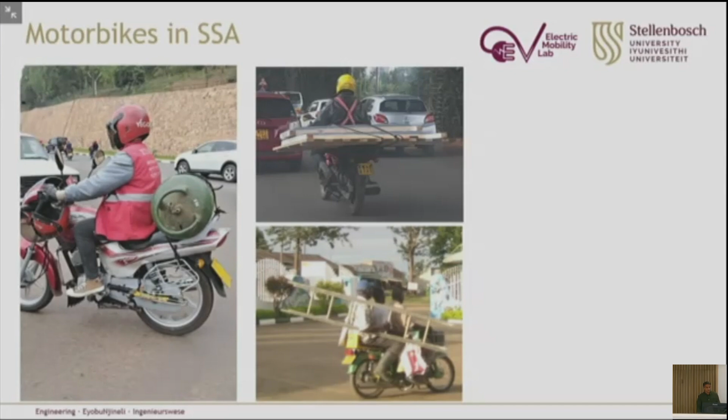Building supplies, as you can see there, gas canisters, and this taken by Heath a month ago in Kenya, again, building supplies. So it's a real mode of transport that moves people.

Obviously, what we know is the last mile delivery, and that is also some of the work that you'll see this morning. So we'll present some work on last mile delivery, but also on what they call boda bodas - it's these motorbikes in Kenya.

And in our lab, the future is slightly uncertain - we'll find out a bit more next week. But what we try to focus on is, first of all, just to keep people moving. But we're also asking the question, how is mobility impacted by electrification? And to what extent does the mobility patterns that we observe lead to a burden on the electrical infrastructure?

Because in the rest of the world, they slap electric vehicles onto the system, and their grids can carry it. But in our case, we have limited generation capacity. We have old and aging and fragile electrical infrastructure, which means a lot of our work is on that as well. We try to also consider the environmental impact.

Again, sub-Saharan Africa is a weird beast. When you go electric, you don't necessarily reduce the carbon emissions that the vehicle emits just because you're shifting the burden onto Eskom, and Eskom tends to be coal dependent. So in future, absolutely electrification makes sense from a CO2 perspective, but currently, as you'll see, not necessarily.

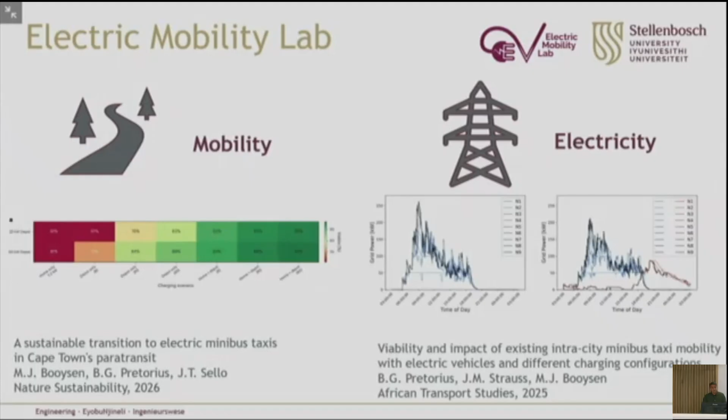So some of the results that you'll see today is Joshua will be presenting on how viable is it to go electric with minibus taxis. Also be presenting quite a lot, all of them, on the impact on the grid - just what does the load profiles look like? To what extent can we mitigate that load profile and shift the loads into the times when there's low energy demand? We'll present some environmental results, so CO2 results, and also some air quality results that you can ponder.

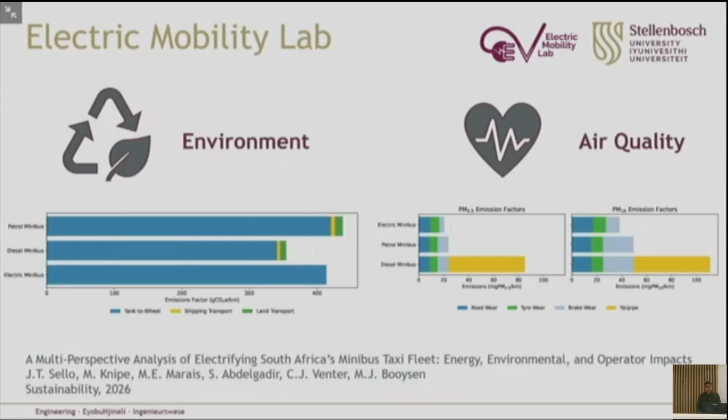If at any time you want to look into this deeper, I sent a PDF out to everybody who's here. You can also go and look at ev.sun.ac.za publications and have a look at all the publications if you struggle to fall asleep at night.

In terms of the jobs and skills, we're working with TETA, the Transport Education and Training Authority, looking at training and educating. So the reason why maybe you weren't informed as well as where you need to be this morning is because I was teaching at the City of Cape Town, teaching taxi owners on electrification of bus fleets, for example. So a large part of what we do is information transfer and building skills.

So what Waldo will be demonstrating a bit later, just after lunch - this is a way to get you back from lunch into the room - Waldo will be demonstrating our test bench here, which is more like a training bench, explaining some of the electrical principles of electric mobility. So we've done a lot.

I don't want to boast too much, but we've published substantially in the last few years. Since 2020, we've almost published 50 journal publications in this group—not a big group—and 12 conference publications. We've had publications in some of the best journals in the world, so the work that we do is relevant, and it's evidenced by the fact that we're publishing in places where people want to read.

What's also important to note is we've been doing quite a few projects on the side. We've been working on taxis and buses, looking at charging facility and charging infrastructure with Sanedi and through the European Union. We've also looked at some projects with the World Bank. Stefan will be presenting on driving behavior work we did, training motorbike drivers on safe driving. And we've also, as I said, developed quite a lot of skills.

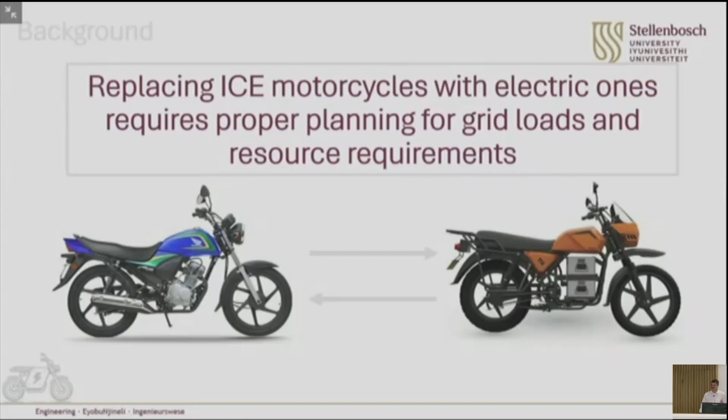My research is centered around this observation that replacing ICE motorcycles with electric ones would require proper planning in terms of grid loads and resource requirements, because we know that our grid is questionable and this is an expensive operation. So the research question that has been set out is quite wordy, but it's basically: how can fleets of electric motorcycles with swappable batteries be modeled and simulated using large data sets with different charging configurations and energy sources, to plan for the electrification of commercial two-wheeler fleets in resource-constrained sub-Saharan Africa?

Now you'll see I highlighted 3 words there: simulated, data sets, and configurations. Amongst all of this wordiness, those are the 3 things that are really important in this pipeline. It needs to be centered on data. The simulations tell us the answers such as grid load and resource requirements. And then there's also different configurations that we set up to try and test different scenarios.

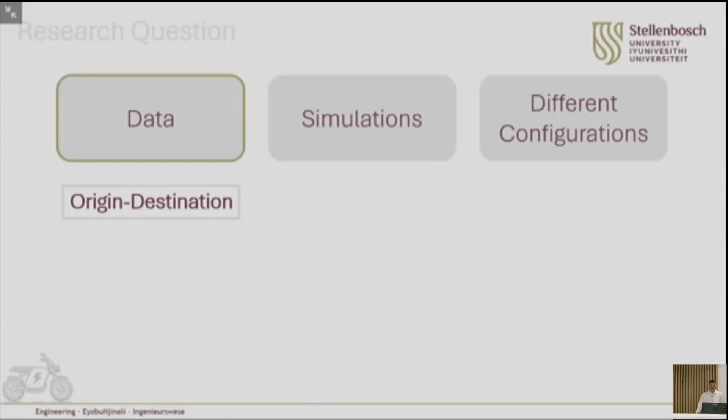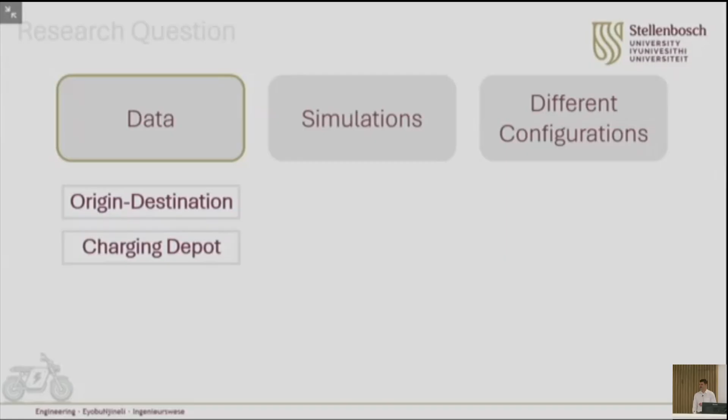There are 3 main data types that we use. Firstly, origin destination data—not ideal, but it would be good to know the routing between the beginning and end points. Then the charging depot data, which is basically the power profile of an existing electric charging station—this is great for validation purposes. And then finally, GPS tracking, which is the best thing we can use so far, which basically tells us where the vehicles are at any given point. From that, we're able to do our simulations.

Essentially, the overarching thing here is to know: if we took an ICE fleet and made it electric, what would the grid load be? What would the resource requirements be? Which we see here in the simulations.

The different configurations we look at can be split up into operator-based or depot-based—one is more behavioral, the other is more managed. If we look at home charging and battery swapping, these are things that operators can do; it's a decision they can make, also coupled partially with the business model of the provider. But then also looking at solar offsetting and off-peak balancing—this is something that if you had a centralized charging point, you'd be able to manage quite nicely.

And we'll look into that a little bit later.

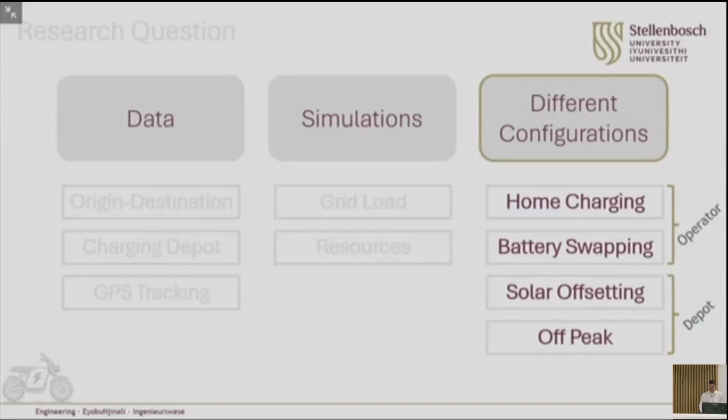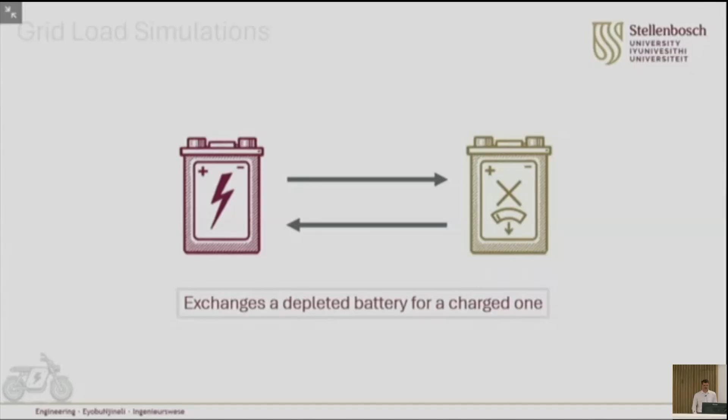Essentially, the crux of the matter is a motorcycle arrives at a swapping station. He exchanges a depleted battery for a charged one. Then all the depleted batteries join a queue and wait to be recharged. Once a battery is recharged and a charger becomes available, the next battery starts recharging. And then all fully charged batteries are pooled together and wait to be swapped in.

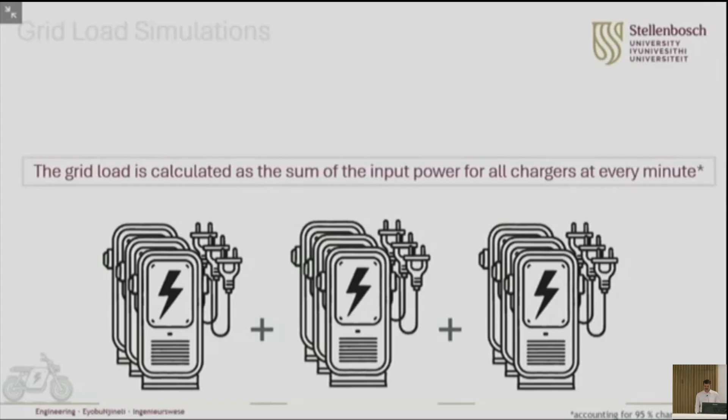As part of the simulation, the grid load is calculated as the sum of all the input powers of the chargers at every minute, accounting for some sort of charger inefficiency. Throughout the simulation, we track the size of the fleet, the battery pool size, and the number of chargers just to understand what would be required to meet the demand.

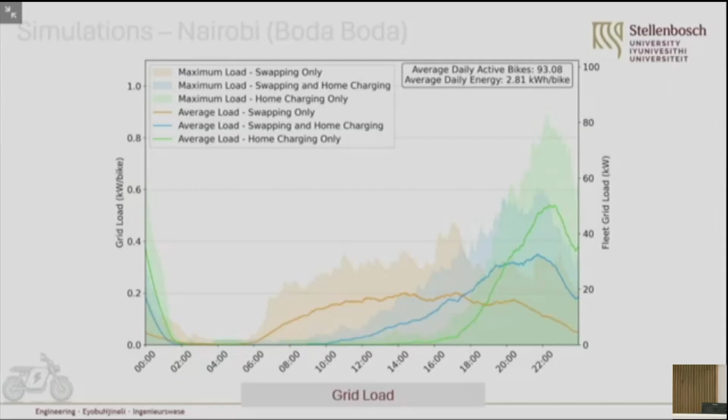So that's why we introduced a third scenario, which is if you were to swap when needed, but also charge overnight and start the next day with a fully charged battery. That's what you see here in this blue line. So that's on the operator side.

But if we were to look at a commercial fleet, for example, in Cape Town, this is data taken from a last mile delivery service provider. And if you were to look at this in terms of a fleet that had a centralized charging point, and you were able to try and schedule the charging in a way that you could, for example, balance it to only use off-peak time of use tariffs, this would be something that we would look at.

Obviously, this requires a little bit more resources initially. This would require more batteries, possibly more chargers. But in the long term, your operating expenditure will go down because you'll be paying less for electricity.

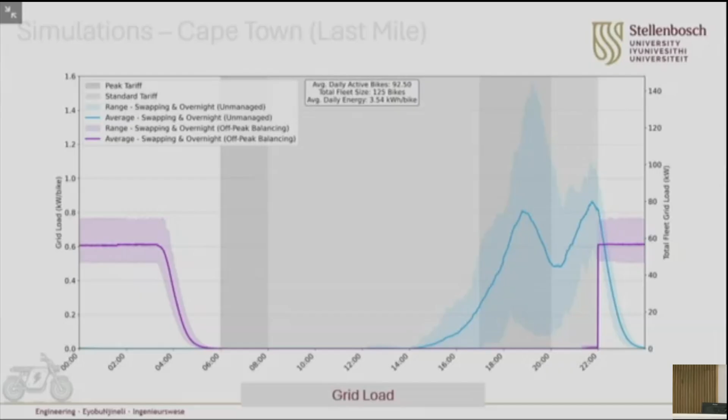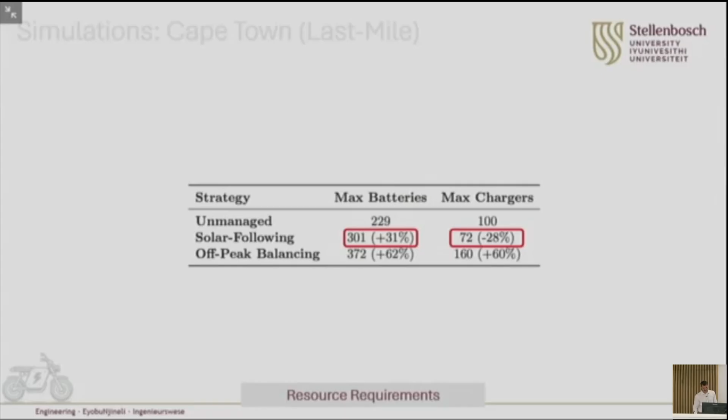Basically, off of these simulations, we see that there is an increase in resources that would be required. It happened to be the case for the solar following that there was a decrease in chargers. It's not always going to be the case, but we can see that the solar following approach definitely did better than the off-peak balancing in this case.

Just another side note, we've looked at batteries, looked at chargers now, but before anything, it's essential to look at whether your fleet is already optimized before electrification or anything. We saw in the Cape Town last mile delivery case that they had a fleet of 385, but with just some basic optimization, we could meet demand with 125 motorcycles. And that's before any electrification or anything. So we can see that these fleets are already kind of overinflated.

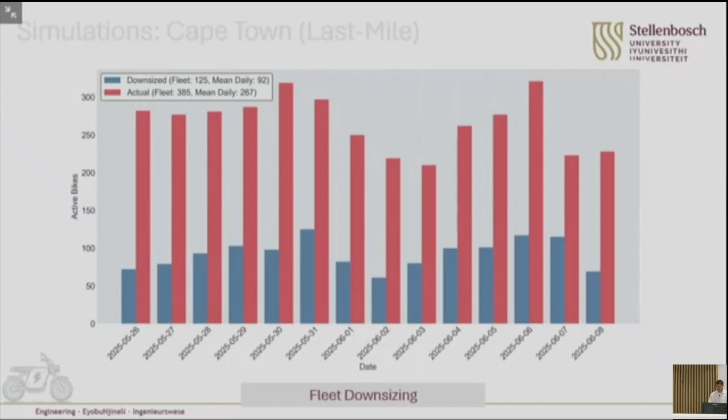So this has all been about the simulation side, but there are constituents of the simulator that have also been really good to get into and do some research on.

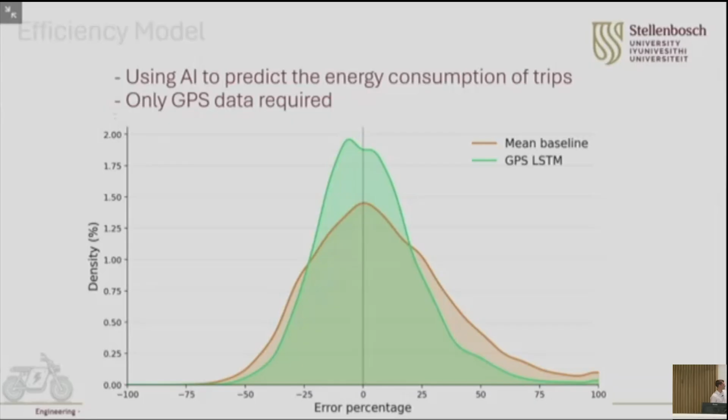Another thing we've developed is using AI and machine learning to predict the energy consumption of trips. In this case, this was for electric motorcycles, once again in Nairobi. This is cool because it allows you to predict energy consumption based off of just GPS coordinates or GPS data alone, and it's a much better way of doing it than just using the mean. You can see on this plot the difference in error rates versus just blindly using the mean - a bit more sophisticated.

Okay, cool. Is that it? Okay, yeah.

As Heath is walking up, I just want to mention, this is freely available - you can go and download it, and then plan for grid electrification and see what the impact is. Just as a side note, this crazy dude here finished his master's and his PhD in 14 months.

Testing, 1, 2, 3. Okay.

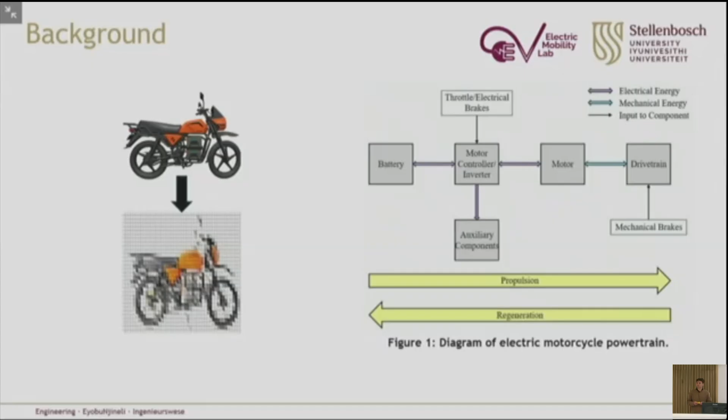I've developed two powertrain models of the Roam Air: a simple powertrain model and a more intricate digital twin. The simple powertrain model is driven by measured speed, with the tractive force calculated at the rear wheel, and calculations flowing from the wheel through the motor and inverter efficiency maps and to the battery. This model enables simple and fast simulations and is used to assess the impact of component parameters and riding conditions on energy consumption.

The digital twin is driven by throttle and brake signals, which translate to torque requests that drive the bike. This model consists of 4 subsystems: the battery equivalent circuit model, the controller block that emulates the actual bike's control processes, the motor model, and the vehicle dynamics block, which includes the drivetrain parameters and calculates the environmental forces on the bike. This digital twin enables the user to swap out components or change controller settings and test the relative performance of different powertrain configurations for a given drive cycle.

The component model parameters were determined through experimental testing of the physical components. Laboratory tests were conducted to derive efficiency maps for the motor and inverter, battery model parameters, motor model parameters, and drivetrain losses. Additionally, road tests were performed to assess the impact of speed and battery state of charge on regen braking, and to determine the aerodynamic and rolling resistance properties of different rider and bike combinations.

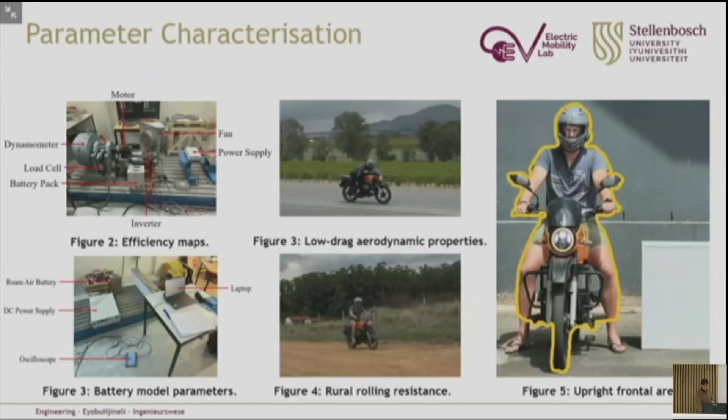For 6 drive cycles generated in Nairobi, Kenya, the simple powertrain model predicted consumption with errors of less than 3% for half the trips, and less than 12% for the other half. These larger discrepancies were due to GPS errors and not incorporating component power limits.

For 6 drive cycles generated in Sello, South Africa, the digital twin predicted energy consumption with errors less than 3% for 5 of the trips and less than 12% for only 1 of the trips. The 12% error is attributed to the model's inability to track rapid throttle modulations. Despite this limitation, the predicted battery power and motor speed profiles still closely track the measured profiles, as shown in Figure 12.

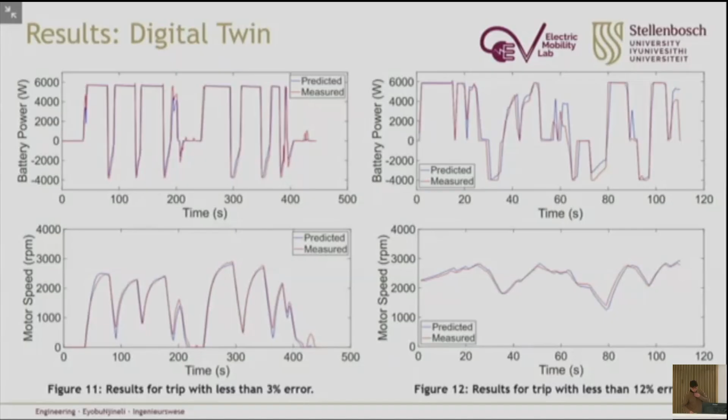Thanks, Heath. Just changing something here. Should come up. No.

No worries. Just in terms of Heath's model that he presented, that model can be used to do virtual emulation, so you can basically deploy 100 bikes in Nairobi and see what the impact is without spending a cent.

Nice, that was like a bombshell that he just dropped there. I hope you heard that.

Good morning, everyone. So I'm Dr. Stefan Lacock, and yeah, I'm like the practical reality of this lab, because I'm the one that has been hit straight through the face by the business world of going electric, especially in South Africa and across Africa. So I don't want to come over too negative, but I'm going to try and give my best impression of what I think is currently going on and what we can do to fix it, and how actually all the research that's being displayed here today and that we have done over the past years really comes to a point where you can practically implement it and make some critical decisions.

But before that, the first thing that I need to present to you is that we are trying to improve the safety of commercial motorcycles across Africa. This is a World Bank project funded by the SSATP. We've also, in collaboration with Discovery - I think most people here have that white chip in your car that tells you that you are driving bad every morning when you're on your phone, even if you just open Google Maps, completely frustrating - we are partnering with them to create a similar model for motorcycles.

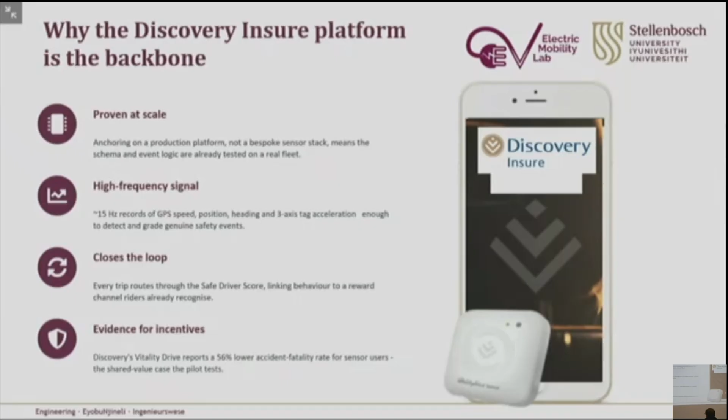But now the key question is: is it the training that improves safety, or is it the feedback that improves safety? So we tested this.

We had a small pilot cohort of 50 riders that we trained here in Stellenbosch about a month ago. We gave them practical training - as you can see there, a Woolies Dash motorcycle driver going through the cones with one hand, far more difficult than you think. Most of the drivers that arrived for training actually arrived around the corner at insane speed. I thought a few were going to fall from their bikes - I think one actually did, just as he arrived. But afterwards, they were really, really confident on their bikes once we completed the training.

We look at defensive riding, helmet use, junction navigation, emergency braking, post-crash awareness, and also the data, ethics, and feedback side of things. We're going to scale this training to close to 1,000 motorcycle riders across South Africa and sub-Saharan Africa.

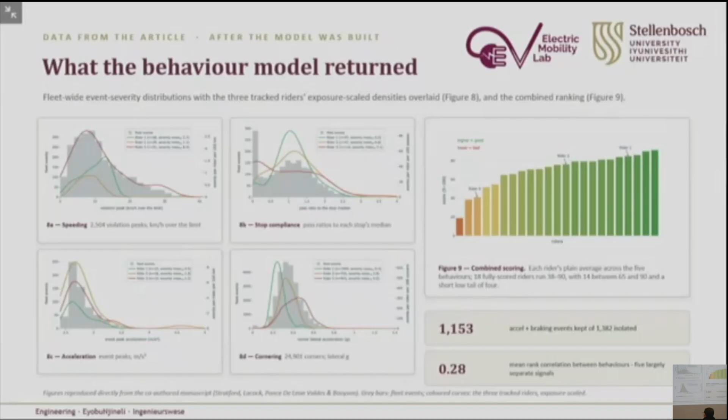With this, we were able to track a lot of behavioral data and put together driver scores. Halloran built the model, and it works well. But what we actually saw, and I think this is the reality check, is that the driver training we gave was all behavioral. Sadly, what we think happened is we gave them more confidence to drive the motorcycle. What we saw is they started skipping more stop streets, cornering more, and actually going faster on the roads. So that brings the question: how do you scale this across Africa so you can actually see a behavioral change in motorcycle riders?

Well, that's where the feedback system comes in. We need to be able to track these drivers daily, create a feedback system where you can actively prompt them on what they're doing wrong, how they can fix it, and what the incentive is for them to fix it. Because the reality is, and what we're going to try to prove through this research, is that without an incentive, the money side of things will always overrule the safety side. If we don't incentivize them to drive slower and create a safer environment for themselves, we're going to struggle to see behavioral change.

So with this, we need a lot of drivers. If you know of drivers, please let me know. I need about 10,000 - that would be great.

But we are continuing with this project, hopefully within the next year, to see if we can have a physical impact on safety. Some of you might be tired of seeing this slide, but I'm not, because it's insane.

We drove the Roam Air 6,000 kilometers across Africa from Nairobi to Stellenbosch. Here's a link to the documentary. It has over 150,000 views already. It would be amazing for you to watch.

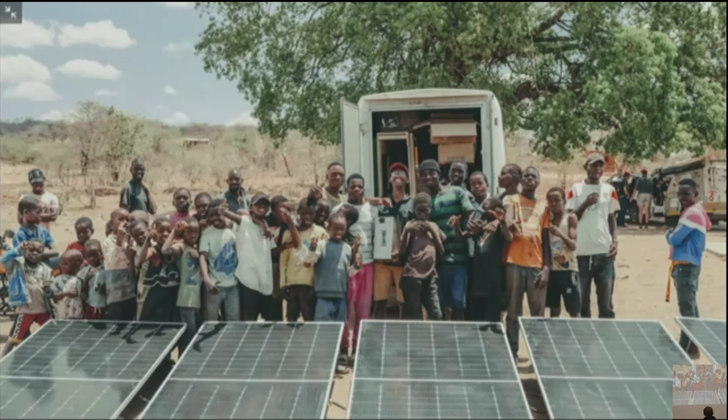But today I decided to tell you a bit of a different thing about the story, since I've presented this a lot now, so this is for me as well. This is a photo that Dr. Jason actually took in Zambia, and I was reminded of it recently since we've done work there.

There's a guy there in the middle with the green and black striped shirt. His name is Booysen. He told us that morning that he's actually a high school pupil who just finished grade 11, but sadly, due to the drought in Zambia two years ago, his village couldn't afford his school fees anymore, so he had to come back to help them farm again.

We arrived at that village about 1 o'clock in the afternoon. This was about 4,000 kilometers in, so we were quite tired. Booysen just saw the bike, and out of everyone in the village, he was the only one who could speak English.

He came rushing to the bike and started spitting facts at me about why electric mobility is the future. I looked at him and thought, I'm supposed to show you what it can do for your future. But he told me no, he has plans for this - he's going to farm this way with the bike, and he has a mill he wants to put on the back, etc.

It just kicked in that motorcycles aren't new in Africa. Electric motorcycles aren't new either, but they create an opportunity in Africa to actually change the system - the way we build the infrastructure and supporting structures around electric mobility gives us an opportunity to build a more sustainable future, not only for urban centers, which I'll get into now, but also for rural settings.

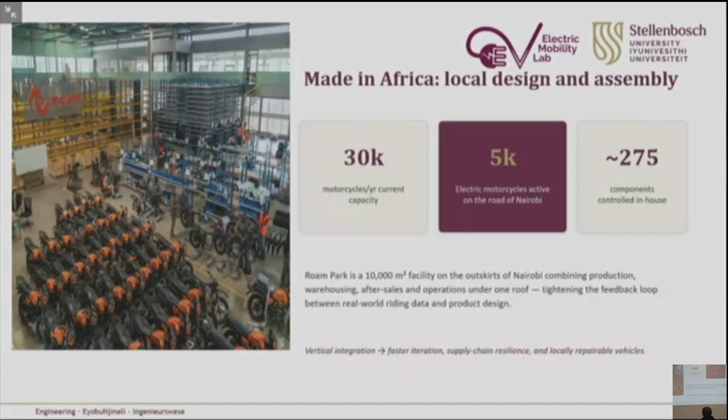275 of the components are localized within the factory. This is the motorcycle, as you saw it beneath - well, I saw it for 6,200 kilometers. It's definitely durable, has all the quirks, all the features. But I think it's good for all of us to have a glimpse and start learning from what's going on in Kenya.

We got hit with this article about a week ago, and I'm being spammed by it everywhere - Kenya's e-bike boom runs into a battery and charging bottleneck. There are currently 25 electric motorcycle companies in Kenya. Only one of them operates on a home charging model, and all the other 24 operate on a swapping station model, the one we are quite used to.

The reason for the bottleneck is due to the following stat: with a home charging model, you need 0.2 times the batteries within your network to accommodate drivers, whereas with a swapping model, you need about 2 to 3 times the batteries. So what Halloran presented just a while ago - he mentioned, quite low key, that if you have the investment or capitalization... the problem is it's in the millions of dollars. If you want to build an effective urbanization system with swapping stations, you need a crazy amount of capital to ensure that system meets the demand of the environment.

And not only that, it's a system that will only work in an urbanized environment. And hence we need to start looking at a system that can potentially accommodate both the urbanized setting as well as the rural setting. So this is not the only solution, but it's one of the solutions.

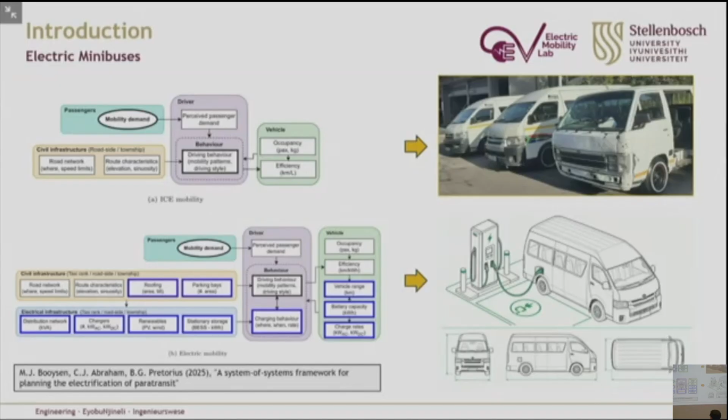So to start us off, a good basis to understand the impacts of electrification or moving a vehicle to electric locomotion is to understand the actual real-world performance for minibus taxis operating on South African roads.

As you buy a vehicle, you'll have a catalog efficiency that the manufacturer, the OEM, says is how you can expect the range to perform in nice tested environments. But when you actually deploy these, you don't really know what the performance will look like.

With the help of Dr. Lacock and Chris, and also Cometro and FlixEV, this is the eKamva vehicle that was imported to be the first pilot of electric minibus taxis in South Africa. If I'm not mistaken, it will be actually operational around October.

Before it's now deployed, we tested and got measurements from the vehicle using telemetry data, then created a model to simulate or predict what the efficiency would be for various driving conditions.

Applying that to a standard WLTC test to get expected performance, we found that for unloaded flat conditions, you have about 0.289 kilowatt-hours per kilometer - essentially how much energy per distance this vehicle uses. This has a massive knock-on effect for range, energy requirements, costing, operating costs, and for our downstream modeling, since this provides a stable input for these models to estimate other effects like infrastructure requirements.

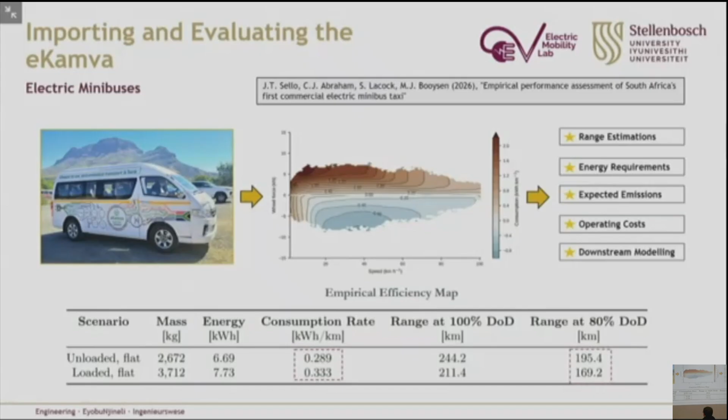A good rule of thumb is also, you can just divide by 3. If I have this much distance I want to cover, I can divide that by 3, and that's how much energy I'll be using. So that was the empirical measurement we got.

Next, as Halloran also touched on well, we need data to be able to plan, organize, and figure out which directions to go in if you want to find the best solutions for infrastructure requirements and deployments. We had various data sets from real world taxi drivers operating continuously throughout the day.

Previously we had fairly limited data. The industry is notoriously opaque, and it's very difficult to get data, but through amazing partners we managed to get a lot of data on a plethora of minibus taxis countrywide. Mainly shown here is the Western Cape, where the Blue Dot data set gave the bulk of the information I used in my models. In Gauteng, a company called Sebenza provided a lot of data, with a countrywide data set including about 7,000 minibus taxis operating currently.

This was very useful for getting the baseline understanding of how long these systems operate daily, how this shifts from a Monday to Tuesday, or from a public holiday or festive season to an everyday operation. You can also look at when they start and end their day, to figure out where the opportunities are for charging windows.

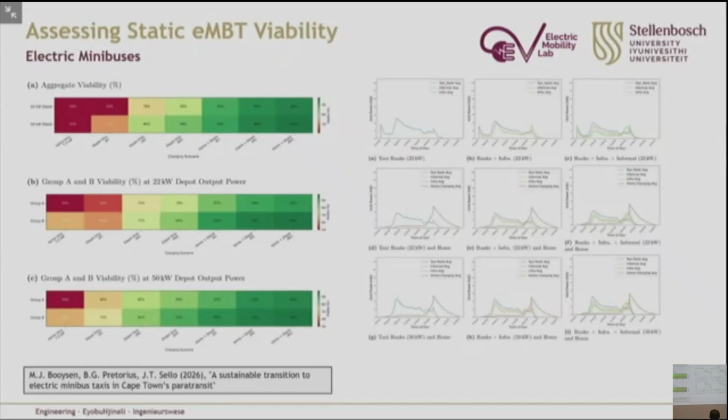After assessing the baseline feasibility, my work came in where I try to understand the behavioral implications of electrification. Through this, I use what's called an agent-based model.

Minibus taxis have a lot of agency. They are able to make their own decisions on their scheduling, their routing, and so on. We can look at the data to inform how that looks on the aggregate, but there isn't a hard-fast rule that says minibus taxis will leave their house at 4 o'clock and come back home at 8 o'clock. So we need to be able to work with that randomness and agency and build that into our model so that we can better plan for that.

As they go out, they might decide to charge. Once they've managed the massive bulk of peak morning traffic or peak morning passenger demand, they'll decide, okay, I need to charge now - this is the best opportunity to charge. Balancing charging opportunity and service delivery is a massive challenge in this kind of model. How do you actually assess that and incorporate it into your model so you can get accurate results?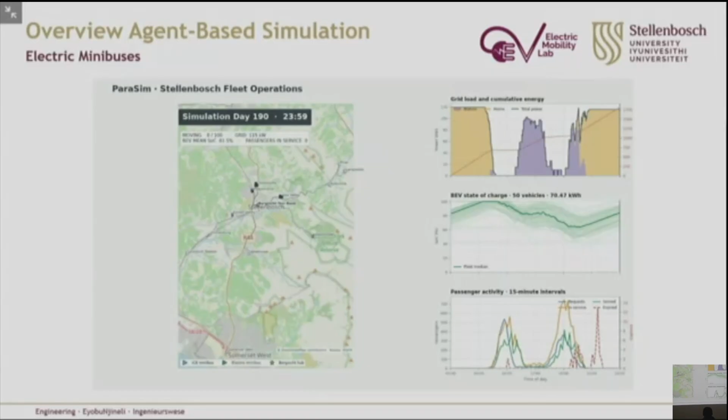What's nice about these kinds of models, as opposed to the previous baseline feasibility study, is that you can actually assess the impacts of electrification on service delivery, on passenger requests, how many passengers were picked up in a timely manner, what the effects on wait times will be, and what the effects on the driver's side are, like their average occupancy.

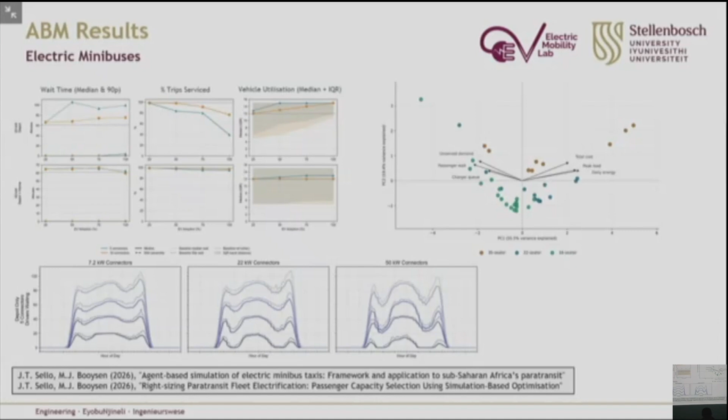Lastly, I want to speak on a very important aspect of electrification, which is the environmental impact. Thinus mentioned early on that yes, electrification is important in terms of long run environmental and sustainability goals. But at the current moment, the carbon intensity of South Africa's grid, if these vehicles are charging off the grid directly, won't really see that benefit.

So we actually do need to be very serious about how we deploy utility scale renewables, or at depot level deploy solar charging, at least to offset and make these vehicles a lot more green.

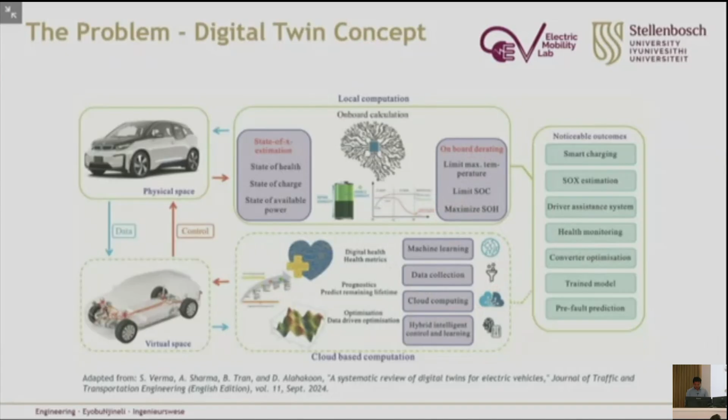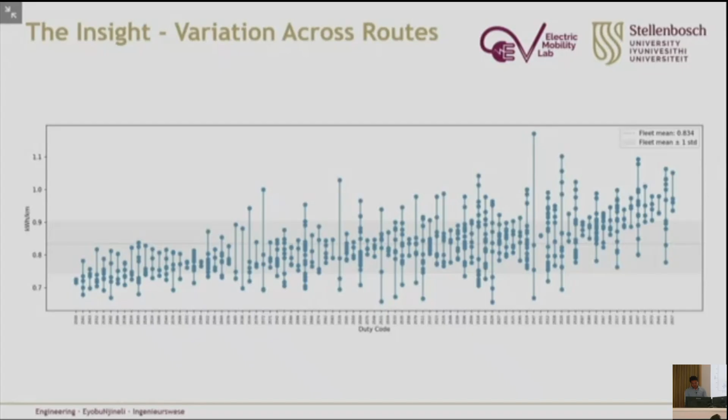So we asked the data: what is driving this differentiation in consumption? The bus departs and returns to the same place, at least in the case of Golden Arrow, so the net incline should be zero - it shouldn't really have an effect, right?

The answer surprised us: it wasn't geography that had the biggest impact on consumption of the electric vehicles. It was the conditions the buses needed to operate in. It's barely the route at all - what matters most is when the bus leaves and how cold it is outside. That's the insight a flat average was always going to miss. It's not that the buses are unpredictable, it's that what's driving them is not geography, but conditions.

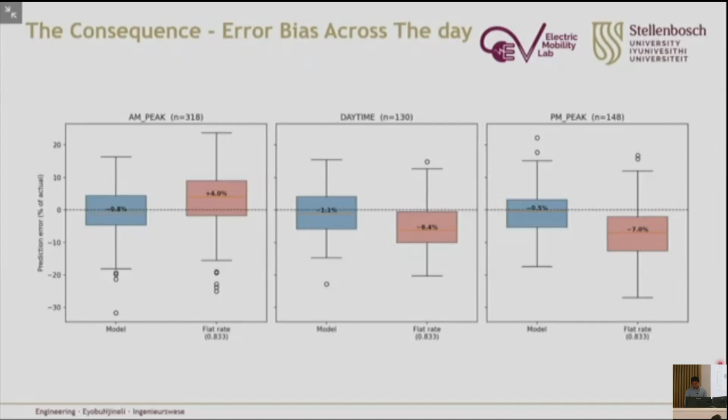Then in the afternoon, it swings the other way around. As we can see here, in the afternoon, it actually overestimates between 6 and 7%, which sounds safer, but it means that capital gets spent on chargers and grid connections that isn't actually needed in that period. So you can't fix this with a single correction factor either, because the error isn't constant. It flips direction across the day, every day. You need the full time-varying picture, which is what the model gives you, and the flat number never can.

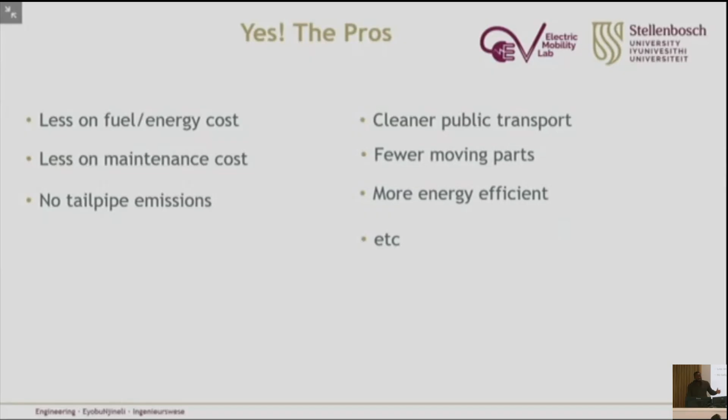That guy said yes, absolutely, we should get an electric vehicle. So I'm talking in the voice of an industry-minded person, where we're in a meeting and everyone thinks we should get an electric vehicle, and that is what my boss is saying - yeah, let's get an electric vehicle. But there's a problem that no one is talking about.

And that's where my research came into, because we needed to figure out what is the negative coming out of the good thing we're trying to solve, right? And the problem was the charging problem. So that is a big thing.

So one big thing I picked out of university, coming out of undergrad and going into the industry, was looking at big complaints on the electricity bill. There's a thing called demand charge. And if you go above a specific NMD, which is notified maximum demand, Eskom or your municipality charges you a particular penalty fee. That is very expensive.

So that is even exclusive of what you actually consume from the grid. And there's something called demand charge, which is your highest KVA that you ever pull in the month. Eskom charges you at a very specific rate for that. So demand charge is a problem, and the charging problem is a problem here.

So what happens in the case of Golden Arrow, using as an example, is all vehicles arrive, and the question is when should we start charging? First time, let's just charge when we arrive. So all the buses are being charged when they arrive. And we noticed that we're charging during the peak period. Electricity is very expensive in the afternoon or evening compared to at night, because that's the off-peak period.

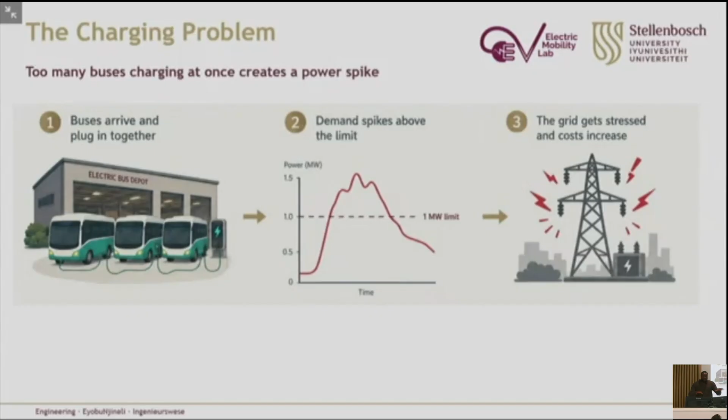And that's where my research came into, right? So the first step, okay, it's a lot probably. So in my research, what I thought about was... What if we could build an optimization model?

Just simple, just get it like a mini computer. What it does is it takes in all the data, the vehicles' arrival time, the SOC, the amount of time needed for the vehicle to be at the depot, for it to be charged before the next period. So it takes all that data, and once the vehicle arrives, maybe by 5 p.m., whatever time it arrives, they all wait till 10 p.m. at night, and it staggers the charging.

So what it does is calculate based on the SOC it arrives with. If a vehicle arrives at 60%, or another arrives at 30% SOC, the 60% vehicle just needs 40% to charge, and you could charge it for a shorter period, or for a longer period with a very low kilowatt. So instead of giving the same demand charge capacity to each vehicle at the same time, you stagger it. It measures based on what is needed for each vehicle.

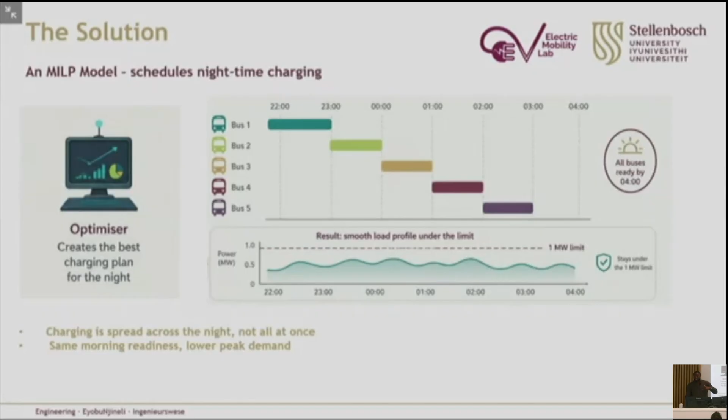And that is the nutshell of what my research was. Instead of them paying so much on their demand charge, we could bring down their demand charge by 17%, which is the essence of getting an electric vehicle, because you actually want to pay less on electricity and also utilize the energy efficiently from the vehicle.

So we brought down the demand charge by 17%, and in the case of Golden Arrow, we tested with 50 buses, for example, at this stage, because there are only 50 buses available at Golden Arrow at the point, and we needed to stay below their NMD, the notified maximum demand. We charged with stagger charging and brought it down to less than 1 megawatt. And then all the buses were ready by 4 a.m. for the available dispatch. So thank you, that's my research.

Just to be sure, we simulated it. We didn't actually, they got there before we did. We came up with an answer and said, hey, it's 27 kilowatt. And Gideon said, yeah, we've been doing it for a week or two. So they were there before we came up with the answer.

Now we're shifting again. This is actually a final year student. We're hoping to get him onto a master's project next year, presenting on electric scooters.

Morning, my name is Ben. As Mr. Booysen said, I'm a final year mechatronics student currently doing my project, which involves developing a digital twin for an electric scooter. A digital twin is essentially a working copy of the exact scooter, behaving in the exact same way, so that we are able to run tests on it without needing the physical scooter.

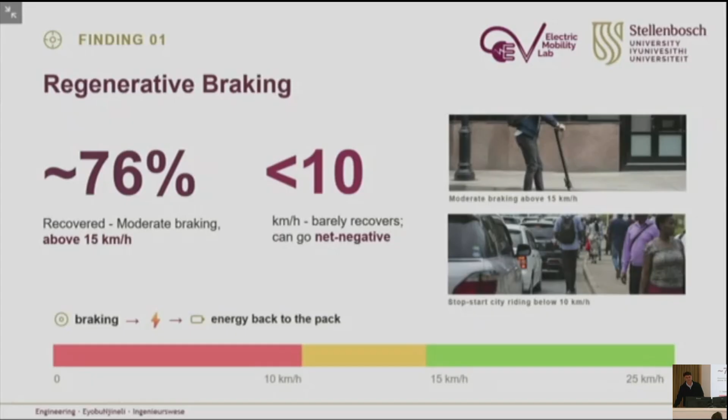Once you start measuring and stop assuming, there are certainly a few things that turn up that nobody would expect. Here's one that surprised me the most: regenerative braking. That free energy you're supposed to get back every time you brake recovers at 76% above 15 kilometers an hour.

So yeah, it recovers 76% above 15 kilometers an hour. But as soon as you drop below about 10, exactly the speed at which stop-start city traffic takes place, it barely works at all, sometimes consuming even more energy than we are getting back. Therefore, anyone planning to size a battery or daily range for these scooters cannot rely on this free energy coming back, not in our traffic, especially because this is where most of these scooters will be operating within the city.

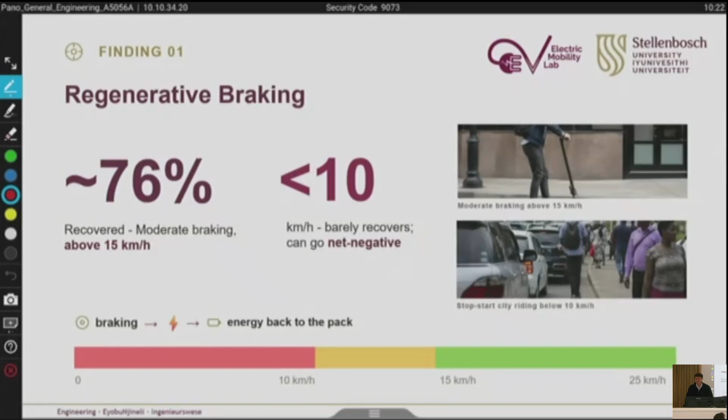It's the same story when looking at the charging and the battery itself. Two more things worth noting, and both change what you would actually budget for. First, how you charge it matters: a full charge runs at 87% efficiency, and a quick daily top-up runs at 82%. Therefore, a fleet that is constantly topping up is silently paying more per kilometer than one that is charging fully less often. Combining all these numbers together, it comes out at about 7 cents per kilometer for the scooter to run.

Secondly, the label lies a little. This pack is supposed to be getting 6 amp hours, but we are actually only getting about 5.3 of those, and that shrinks further the harder you ride it. This might not seem like much, but multiply this across a fleet's range promises, and this is the difference between a scooter that makes it home and one that doesn't.

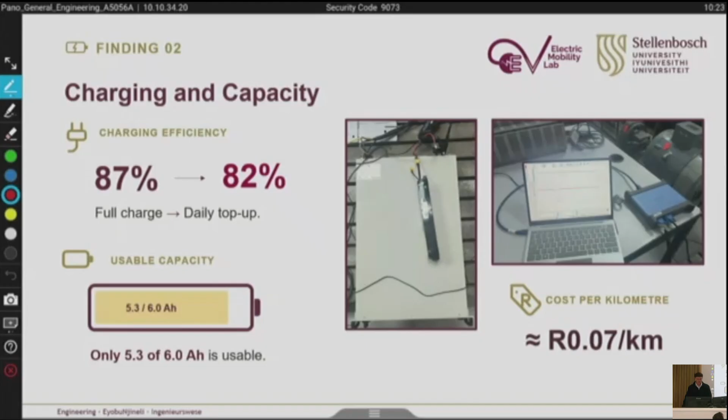Two small gaps on paper, but exactly the type of metric that can ruin a fleet's numbers if not checked out. So I'm busy checking it out properly, out where it actually matters, and not just once. So far, I've done 4 rides, over an hour of real riding, about 19 kilometers in total, on different routes, different terrains, both steep climbs and flat cruises as well.

Every ride's worth of data holds together too. I built a way to line up the GPS, the altitude, and the scooter's own onboard readings. By the end of the ride, they agree on where you are to within half a meter. This level of testing brings up real problems, which is exactly what you want to do. So far, I found and fixed 3 bugs within the model, and since that's been sorted, the prediction error has dropped by roughly 2/3, where we are getting energy prediction errors between 0 and 5%.

Chasing down those bugs has turned up something even bigger, a genuine, recognizable limitation in how these models are normally built, the kind of limitation that is noted down in research but is yet to be solved. This gives the next phase of my project a clear and concrete direction, and not just to do more testing. Though with that said, this is no longer a guess, it's a tool.

Anyone looking to buy or invest in a fleet of scooters now has real answers to do with range and running costs, and can know this before having to spend a rand, not after. Anyone planning to build the next one of these now has real numbers to work on when sizing the battery or the motor. This is exactly the type of work we are trying to do here, to stop importing assumptions from somewhere else and start measuring what's actually true here in our climate, on our roads, with our traffic. And for scooters, I just think the sums might actually hold up.

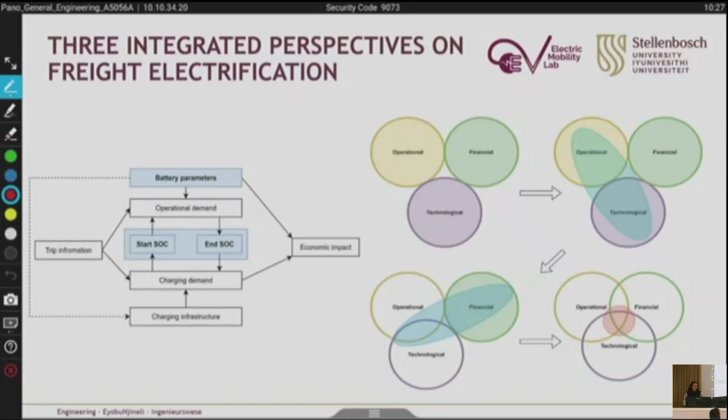For the study, some vehicle movement was analyzed, using only trip level information from a single vehicle, and understanding the patterns for vehicles that are feasible, possibly feasible, and then not feasible. From this, it was found that it's not necessary to just look at your vehicle, you have to actually look at your schedules, the time constraints within logistics.

These play a major role and add to the complexity of actually electrifying a fleet. All of these aspects actually have a financial impact and are under strict service level agreements, which add an extra complexity since you have to meet your customer demand. So when looking at a holistic implementation, all these elements have an impact on one another when making decisions to implement the technology.

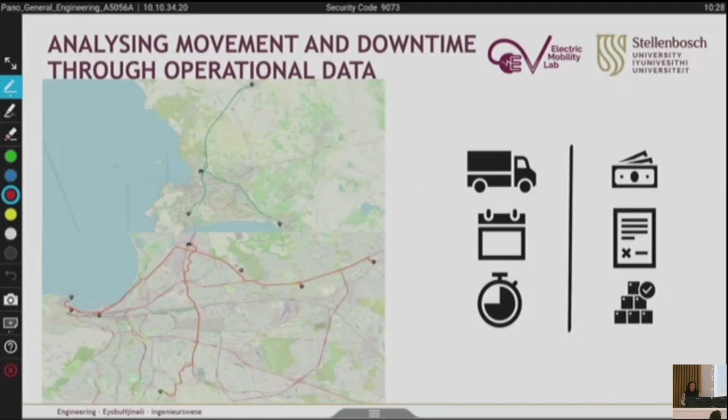One of the main findings from the study was by doing a financial analysis, looking at company financial data, and getting to a key metric for cost per kilometer. One of the key aspects when looking at operations is whether a vehicle is actually doing enough kilometers to justify investment to have electric trucks instead of the current diesel vehicles.

Another key aspect that came from the study was that when implementing charging infrastructure or a larger vehicle capacity to ensure that you actually are able to meet all your operations based on the size of battery, the charging infrastructure actually plays a minor role in the implementation cost.

So meaning that when you have a larger battery, you're paying more, but if you have more charging opportunities, you can actually have a smaller battery size and make the cost less and the financial burden less on a company to implement the vehicle. So from this, what does it mean?

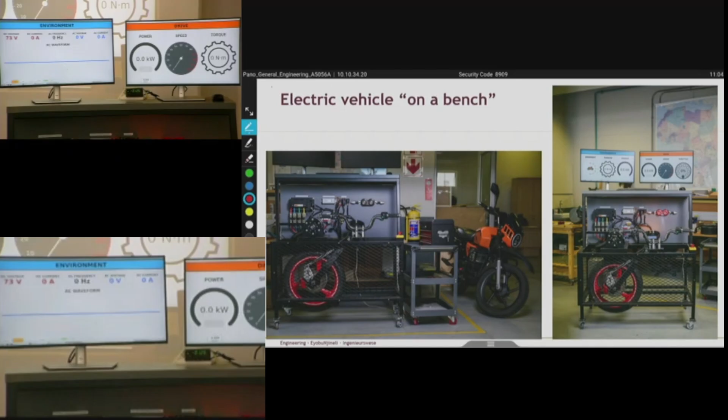Oh, and very important, so for this bench, that was the core principle of how our vehicle works. On this bench, we've got a second motor, very important. At the back, you'll see we've got a second motor.

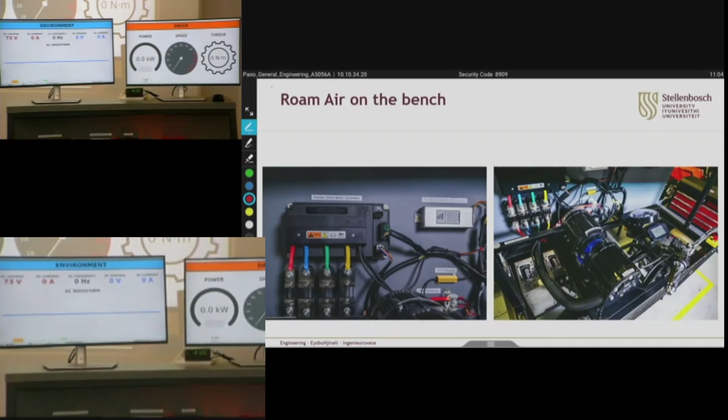That is what we call the environmental motor. The front one is the drive motor, that's the actual vehicle which we are driving. The environmental motor at the back is just another motor we can use to simulate our environment, to add some load to this vehicle so we can see the current spikes and the waveforms. That also gets driven from a battery with its own inverter, and it's hard coupled in the middle, the two attached to each other. That's the core working principle of this bench.

This enables us to do a lot of simulations. It wasn't the sole purpose of it, but later on we realized this is sort of a dynamometer we built here, and we can do a lot of normal simulations, regenerative patterns, drag situations.

This is a GUI we built for us as engineers. This was actually the first version we built, and then Dennis came to me and said, Waldo, a lot of people don't know what's happening here, so let's tone it down a bit. So we built one which just shows some core gauges in terms of your torque, your power, and your speed with the throttle.

The one I have here today is a third version, which also shows on this side our AC current waveform, with the DC and the AC, and on your right side we just have your power, speed, and torque.

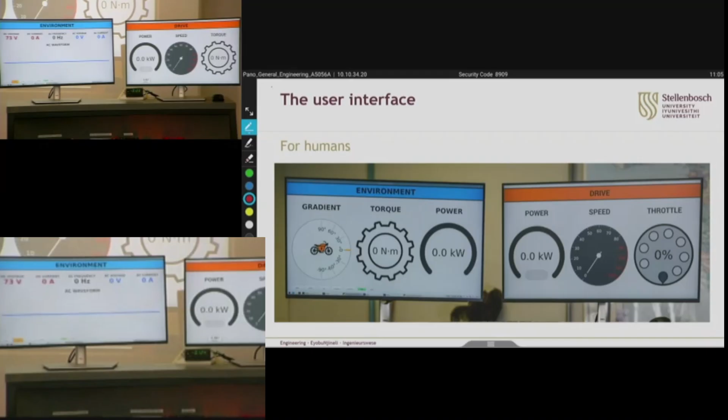Cool, so I'm going to do two demonstrations just to quickly show you. The first one I will do is just a normal flat road test. The reason I clicked flat here is because in normal driving situations you do have some friction, some wind drag, etc. So it's not just a free spinning wheel with the chain, we add some slight load to that.

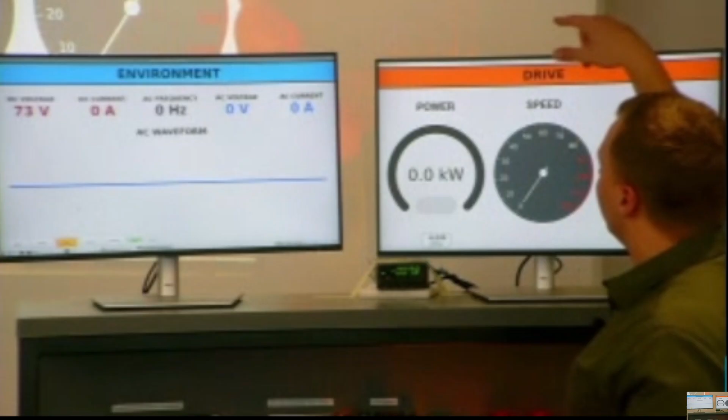On this side you'll see the speed increase a bit, the torque increase a bit, power, and you can have a look at the waveform. Important on the waveform side, you'll see its frequency, and the amplitude of the waveform also increases as I'm giving it some power.

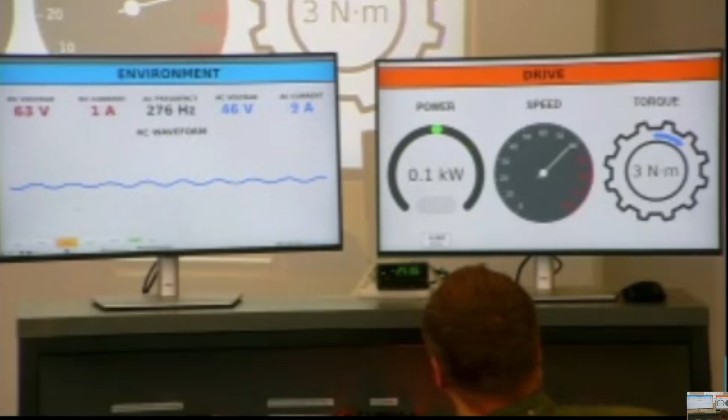You'll notice here at the bottom we've also got an efficiency or consumption counter that accumulates this over time. Secondly, as I mentioned earlier, we can simulate environments.

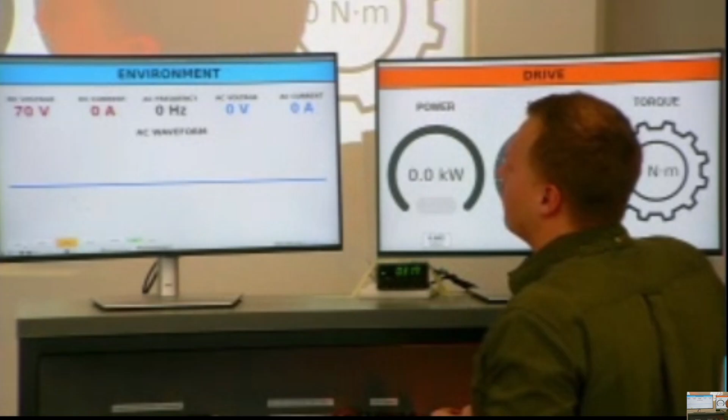I'll do a quick uphill simulation for you. Actually, let me do that while I'm driving. So the simulation will run from just a normal flat, then I'm going to put it into an uphill situation where we're now going uphill. You'll actually hear the motor working harder, we're feeding it more power, and you'll also see an increase in the values up here, more power getting driven and the torque also increasing.

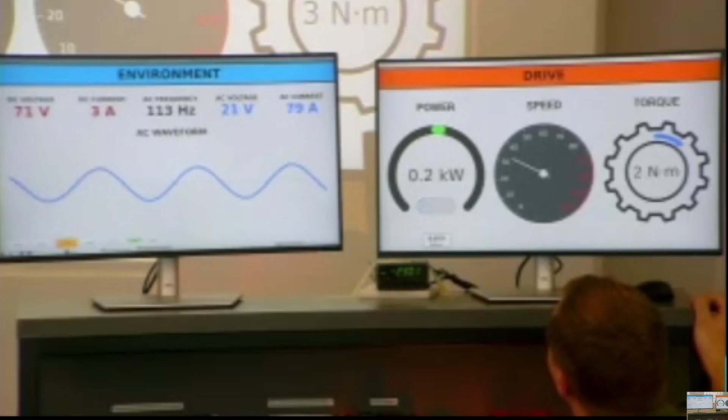And then a final simulation I'd like to show you, to show regenerative power, is going downhill. In this case, it's basically we're freewheeling downhill, can be faster, can be slower. Then the principle is using the motor, or your inertia, to actually give electricity back into the battery.

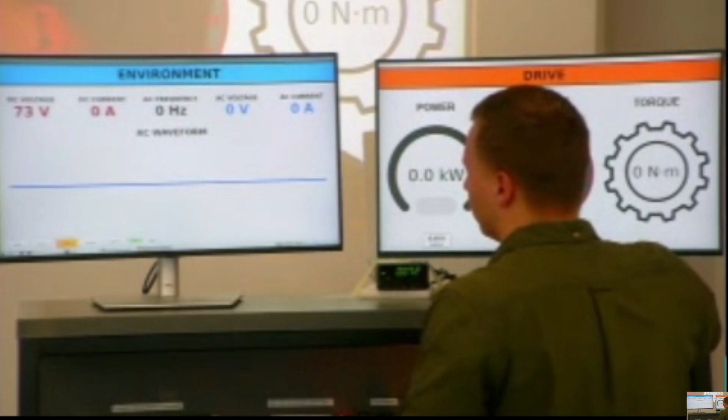So you see, I'm not driving, we're going downhill now, this is totally inertia driving it. Then I'm going to touch the brake pedal. Notice the power and the regenerative power going back into it, and our waveform increasing as well. Important, the DC current now going negative. And then we're just back to a flat.

So this is in essence what we built for training and educational purposes, for people to understand the principles of the motor and how EVs work, because this can transfer to a vehicle, to a bus, just on a bigger scale, with a bigger motor, bigger batteries. I think that's it from my side. Chris?

One of the questions we get asked most often when we do training is people are worried about maintenance and technicians in the country. This is actually a crucial feature, and I think just looking at this bench, that is the essence of an electric vehicle. Maintenance is not a concern. It's really easy to swap things out. All you need is basically a high voltage license, and then you can roll with it. But I think this conveys the simplicity. If you had to build an electric, or at least a diesel or petrol engine onto a bench like this, it would have taken ages and it would have failed all the time. This only fails once a week, which is fantastic.

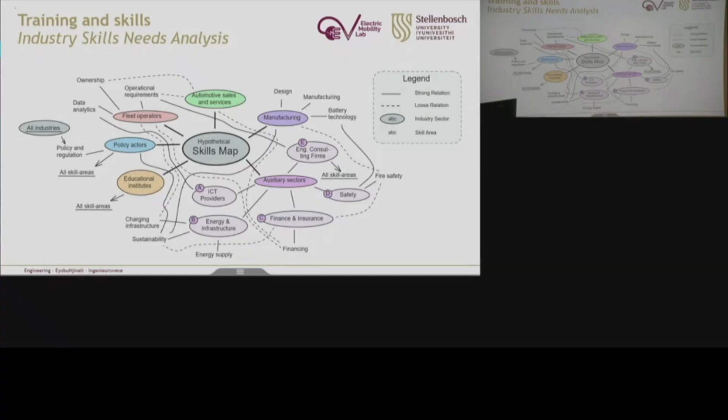Okay, so we then zoomed into each industry and broke that down into various roles, key roles. The previous map had 10 industry sectors, and we found 13 key roles that map onto these various industry sectors. These are kind of general roles that we want to be able to upskill—so you might find yourself here.

Unless you're an educator—then an educator has to fill in all the roles, or whichever roles they're trying to educate in.

And so we developed a framework where each role has, you know, topics or modules that they need to be competent in.

So for example, an EV maintenance technician would need to fulfill modules 1, 2, 4, 5, and 11. And these are the topics of those modules—so an EV technician would need EV fundamentals, electricity fundamentals, motor technologies, and module 11, which I think was safety.

So we're trying to currently build up these modules into individual short courses, and people in the various job roles can pick out whatever modules they find relevant for their particular case.

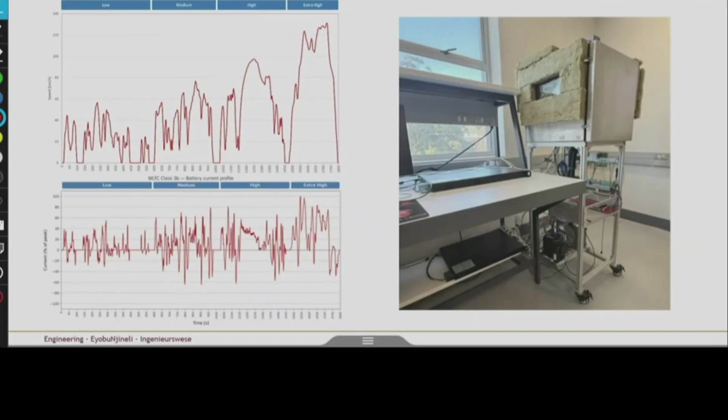So here's some data that we've started seeing from our current cycling campaign. We're about 2 months in. We are cycling 8 cells, grouped into groups of 2, so every successive 2 cells are undergoing different cycling parameters. We're already seeing some interesting things happening throughout the cycles.

We are keeping a constant temperature because of the chemical nature of these cells—they behave differently at different temperatures. At 25 degrees Celsius, we run the WLTC drive cycle. From a fully charged cell, it's a 30-minute cycle, so we run it repetitively until the cell is discharged, then refill it again. That is one cycle, and we consistently run that.

But we're not limited to that specific drive cycle. We can simulate anything—we can put together a bunch of different drive cycles and data sets to simulate a specific route for a bus or a motorbike. And that's just on the driving side. We can also look at different applications, like peak shaving and grid support batteries, or data centers or residential housing. So it's not just limited to electric mobility in that sense.

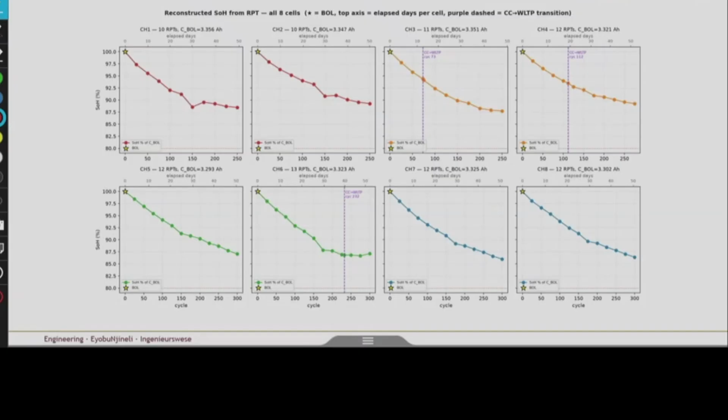This data is just scratching the surface, however. From the current data we have, there's a bunch of different directions we can look at, a bunch of different insights we can glean. An interesting thing we've seen from this data is it's actually raised more questions than we had when we went in. Those are all questions we will try to answer by processing the data, and also with future cycling campaigns that we'll be doing.

It will also control temperature, but we're aiming to introduce humidity control as well, because that affects the performance of these cells. That will allow us to simulate a wider array of geographic conditions.

That won't be the end, however. We're already conceptualizing future environmental chambers, platforms and capabilities for our systems. We're aiming to build chambers that can cycle more than 200 cells, and also complete battery packs on top of that, so we can look at the dynamics between packs and cells. We will also be introducing shaker beds to simulate the vibration these packs will experience in the field, and investigate a bit more what we can see in that sense.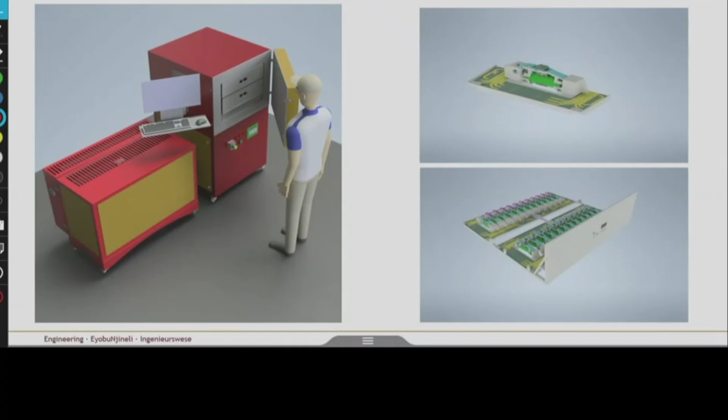Today I'm going to talk about something we don't like to admit. When we say we're building EVs anywhere in Africa, what we're actually saying is we're buying from China and slapping it onto a different frame. That is not what building locally means.

The problem is China is by far the largest producer of everything. When it comes to motors, inverters, batteries, everything, China controls basically the entire supply chain. One thing about ever moving this production to sub-Saharan Africa, South Africa, is it's always going to be a case of supply chain resilience, whereby if we wanted more exotic materials and technologies, we'd be fully reliant on importing every single bit of it.

So that's why some of our research has focused on what technologies we have from industry here right now, and what industrial capacity is available. We're already building motors and inverters for standard commercial applications, like induction machines and synchronous machines. We build them locally already, but we're not building any EV motors whatsoever.

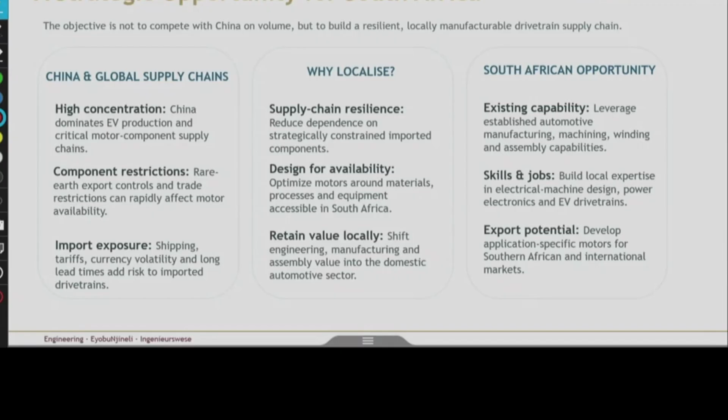So part of that was to build two different prototypes. One is for the Roam electric motorcycle, a 6 kilowatt prototype. I've already finished testing it on the dyno, and it should be finished on the bike towards the end of this month. Then we'll know the range comparison between that and the Roam electric motorcycle.

And the 90 kilowatt prototype has already started manufacturing, should be done by end of October, beginning of November. But the key part is we're trying to use everything you can source in South Africa. All the copper and steel is from here, the casting is done here. The only things we're buying are the bearings—everything else we actually make in South Africa.

And the funny thing is we have the industrial capability. This wasn't a machine assembled downstairs by our people—it was sent out to industry, and industry fully built this motor according to our specifications. They can scale this up to be a lot bigger than it currently is.

Now you're always going to have trade-offs when going for a different quality of materials, especially since our materials are lower frequency, mostly centered around 50 hertz applications. But you can still theoretically get a fairly decent drive cycle efficiency, even with a small induction motor or a wound-rotor synchronous machine. You can still get 95% of the way there, doing it all in-house locally in South Africa.

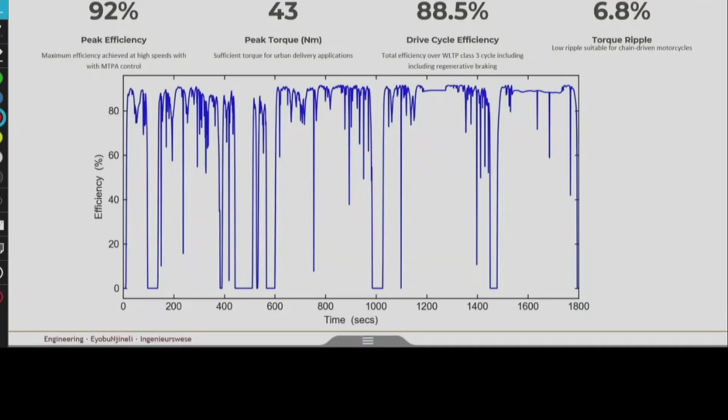Now one other thing we're going to move towards in the future is that as we adopt more electric vehicles, small or big, we're going to end up with a whole bunch of perfectly fine motors we're not using—especially when cars are crashed or reach end of battery life and it's not worth replacing the batteries. We'll have motors still perfectly feasible, because these motors last 30 plus years.

So one thing we've been looking at is repurposing these for micro wind turbines. The idea is: can you take these motors, build a wind turbine really cheap, and put it somewhere rural where it's needed? As EV adoption goes up, demand in rural areas is going to go up a lot. So the question is, can we realistically build small turbines to support these local industries and communities? Experimentally, the answer is yes, we can.

We've got 10 motors from Roam that were decommissioned—they had faults like sensor faults, winding issues, bearing problems. We've recommissioned 7 of them for a total cost of about 400 Rand, so it was pretty cheap to recommission these. We've already tested them as a generator.

Now the next step is to actually put one on a functional turbine outside somewhere. They can generate anywhere from 20 to 30 kilowatts of power, depending on the area and how much wind you have—if it's not a windy day, we're not going to make much power. But the big thing, looking towards the future, is: what can we do here? How can we move away from just buying everything from China and being fully reliant on them holding us captive, unable to do anything?

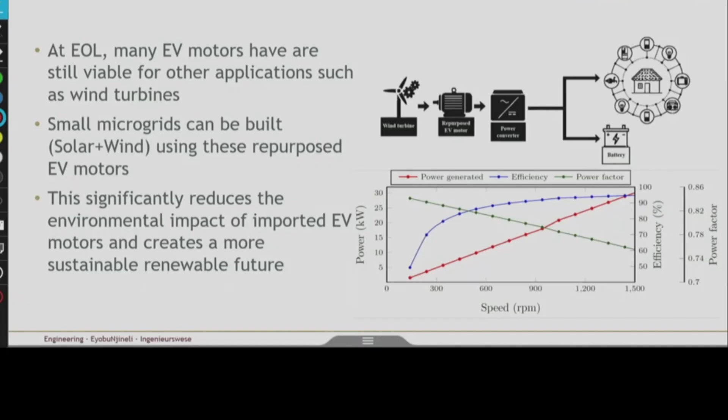I'm currently affiliated with 2 departments in the university, Industrial and Electrical Electronic. The head of Department of Industrial said I should tell you, due to funding constraints, we've had to close our workshop. We're in a position now where we're really on the edge. So if you guys are sat on money or know of something available, please do, because we're effectively terminating probably end of the year if something doesn't come through.

She asked for a moment. I have no idea what she's going to say. Thank you. How do I make this go on the screen? That's what I'm going to say. That's a good thing.

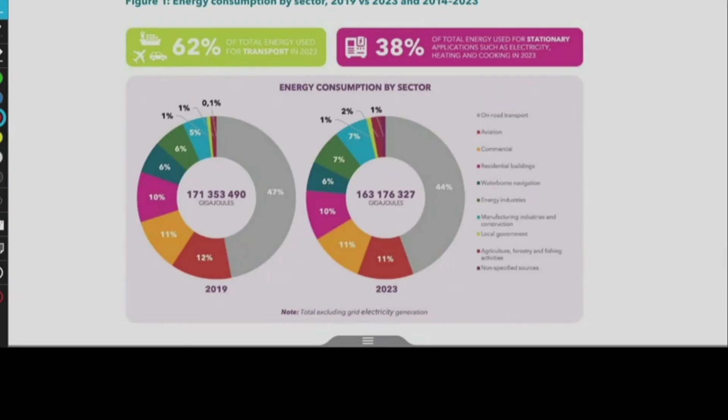I've mentioned the fleets that our corporate services, etc., manage, but we've also got a MyCiTi bus network. It's been great to hear from Gabs this morning, and that is also transitioning to electrical, but slowly.

I'm not going to go through all of these slides, but over the years the city's done quite a lot of research, though not to the depth and technical expertise presented today. As a city, we needed to understand the uptick of electrical vehicles and the potential impact on the grid. This was an old study suggesting an uptick by 2035, but given the fuel price crisis, that's probably a little out of date now.

One of the things we're grappling with at the city is what role we play in terms of public charging. Do we leave it up to the market, or do we define the charging infrastructure, grid, cars, etc.? This is where you can charge, this is how many chargers we want to see, and how do we start to navigate that role within the charging landscape? How do we build customers? Is there a standard way the technology works when somebody rocks up to a charger? Is there policy or regulation around how communication works between the charger and the individual charging? We've done a number of studies across different cities to understand this role, and we still don't really know.

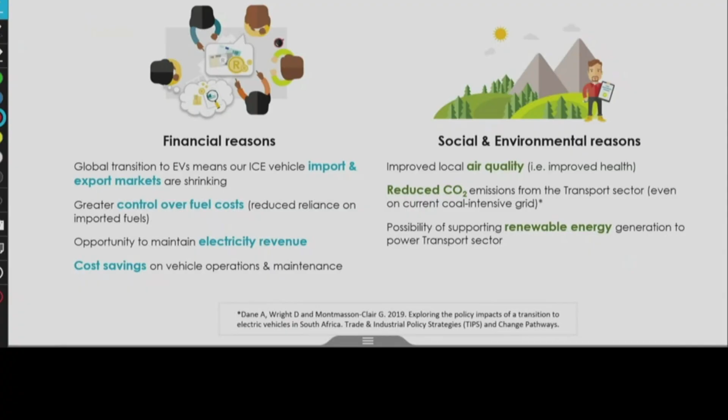This is a little old now, and I don't want to go into too much detail since there's so much technical information in the room. Basically this was a study we did with GreenCape looking at what if we took our fleet vehicles, mostly sedans, and transitioned them from ICE to EVs—what would be the best vehicle? We did this with the BMW i3 at the time. The main outcome was that we can transition the fleets, but only as the research has shown today, it's not a one-for-one transition. It depends on what the vehicle is used for, how it's driven, the type of vehicle, etc. So transitioning our fleet really depends on usage and driving patterns.

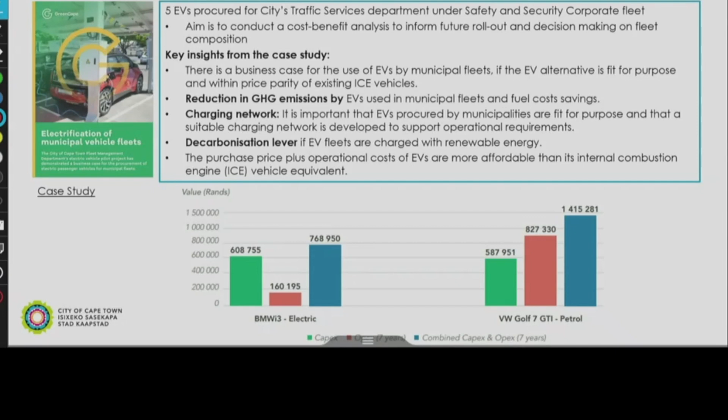This is also quite old, but through UNIDO funding we had two charging facilities installed at municipal facilities, aiming to gather information on charging behavior. These were solar PV, so the energy was free. There aren't a lot of vehicles that come to charge at municipal buildings—not surprising, everybody wants to charge at a shopping mall. But this gave us an idea of charging behavior and how it can be complemented with renewables.

This is our one electric bus in the fleet. Interestingly, this often happens within the city—it's a massive organization and tends to be siloed. They had an order in for electric buses, and there was a real challenge getting the energy demand to the depot site where the chargers were installed, because it was an Eskom area. So it's much easier for anyone doing a bus project to work with the City of Cape Town on electrical supply, because in the end we had to do an arterial tie to get supply from the City of Cape Town side, instead of diverting from a substation five kilometers away.

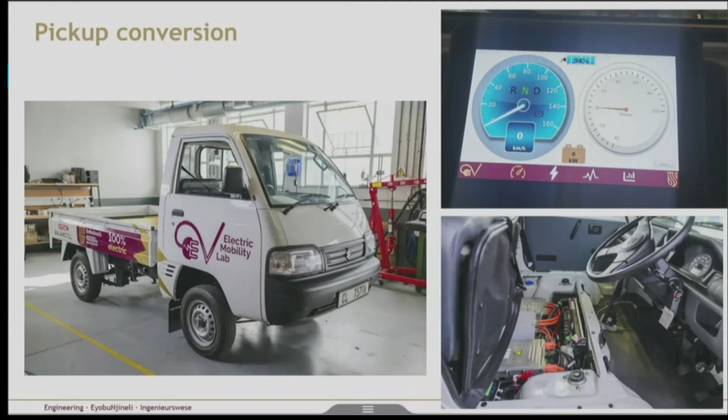This is really an example of excellent engineering happening right here. We're trying to get rid of the vehicle. If you want to buy a vehicle, it's quite expensive, but you can have it. We've also converted this vehicle, but Waldo forgot to charge the battery, so it's parked in our lab, or at least what used to be our workshop. Waldo can try to get it around the corner again, charge it, bring it around.

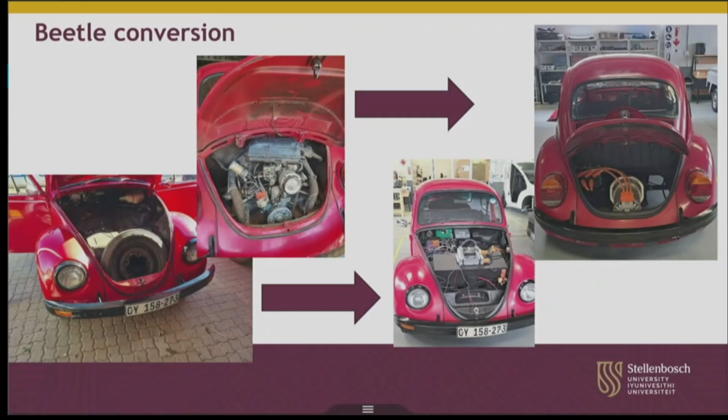The other thing I want to say, maybe what's apparent from what we said this morning, is it's really not about the vehicles, it's to a large extent about the infrastructure. Linking on to what Joe said, Joshua's research has shown, and he kind of hinted at it, you don't need fast chargers, you need charging opportunities. You need places to charge slowly, because that's the best for the grid, that's the best for the batteries, which is the most valuable asset in the vehicle.

In his research and Brendan's research, we found that if you just install chargers, for example, at the informal stops where the taxis stop, you all of a sudden have this opportunity of keeping their current mobility patterns. They can keep driving exactly as they are, as long as you present them with charging opportunities at informal stops, rather than thinking malls, thinking formal taxi ranks.

The other part is, if you allow them to charge at home, then everything just works out perfectly. But they can't charge at home because our informal settlements can't support that level of electricity supply. One of our colleagues here, Bernard Bekker and Justice Chihota, have done research that shows in some cases, if you plug a single taxi into a street supply in Kayamandi, the whole street will lose power. It'll literally blow up the infrastructure. So we need to carefully think about this, because it's to the benefit of everybody if we provide proper infrastructure in the townships and then allow them to charge their vehicles there.